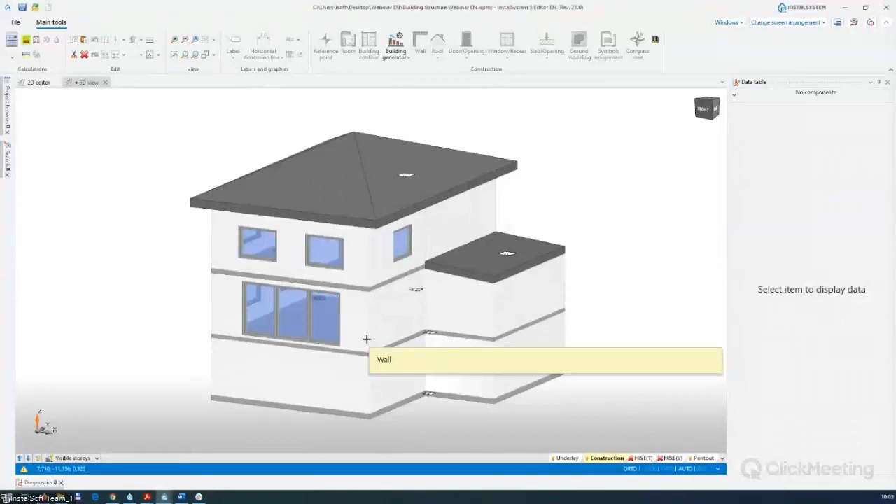In addition, I have prepared another more complicated object for you for today's webinar. These are files based on 2D underlays and BIM files. The whole webinar is connected with the related preparation of the building structure webinar that is available to you on our channel.

And especially the BIM design, which was also conducted with you at the beginning of this year. You can find this webinar when you go to our YouTube channel - we have a special section, InstalSystem 5 webinars and tutorials, just for you.

The plan for today's webinar is as follows: a presentation of tools and recommended design path for calculation of design heat load of the building and its rooms in InstalSystem 5. First, we talk about the available methods of determining design heat load. Then I talk about the new program interface for efficiently performing detailed heat load calculation. Then the main stage will be the recommended path of using the program, with description of individual stages and selected aspects of the calculation. We talk about the standards, how to define the properties of thermal partitions.

Okay, so maybe I open the project, the main project. What you see in front of your eyes is the effect of our previous webinar on the structure of the building. I hope that some of you participated in the previous webinar. If not, I invite you to our YouTube channel, in the English section, which shows exactly how to get to this stage.

Before we get into the design process, which you will see presented as part of the full building structure, the first important thing is that if you want to get the full heat load calculation, you need to have the full building structure. Maybe we will remain in this view, and I'll use the function to hide all walls in 3D view, and now let's move on from general data to room data.

Just click on Windows, General Data, and Room Data. Okay, first we talk about the method of calculating.

First, you can directly impose this value using the user-specified method. So in each of the rooms, you can declare the heat load of the room yourself. You can simply select based on the coefficient that we declare in general from this field for our rooms by switching accordingly in this list.

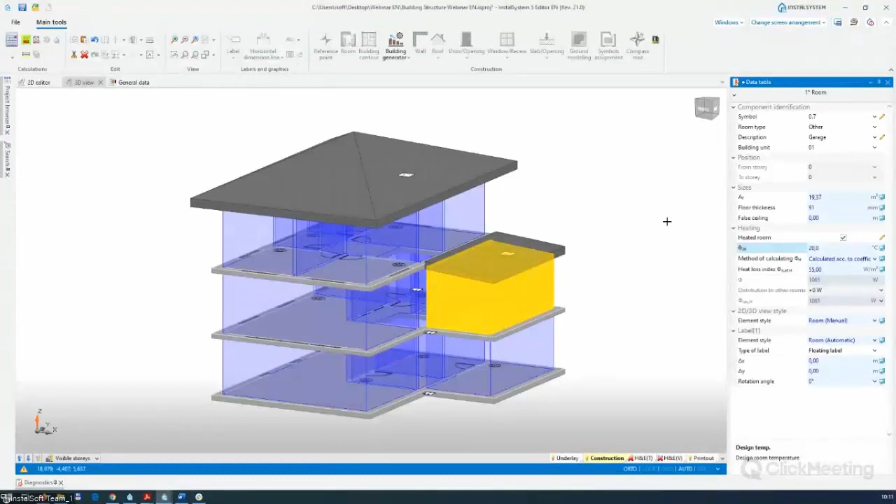It's also important that the room itself must have a checkbox checked that it's a heated room. So briefly speaking, for each type of room, whether for the project, in groups or for individual rooms, you can put this value. For these two options, you do not need the full building structure. The full building structure is not required.

Okay, maybe I go to the general data again, because we will focus on the third option, calculation according to standard. So we can calculate the full heat load. Calculating the heat load of rooms is based on automatic rooms. To obtain such rooms, you must have the full structure of the building, horizontal partitions, vertical partitions, sub-partitions, for example, windows, doors, and openings both vertically and horizontally.

This has to be recalculated by this button, which is our building structure calculation algorithm. Based on the correct calculation of the building structure, we can approach the calculation according to the standard. This is our beginning. In version 5, there is no possibility of tabular calculation of a building that does not have its graphical representation. Certain elements can be added or deleted tabularly, but when it comes to the object itself, this is not possible. We base on the graphic structure of the building, which is the entrance to our project.

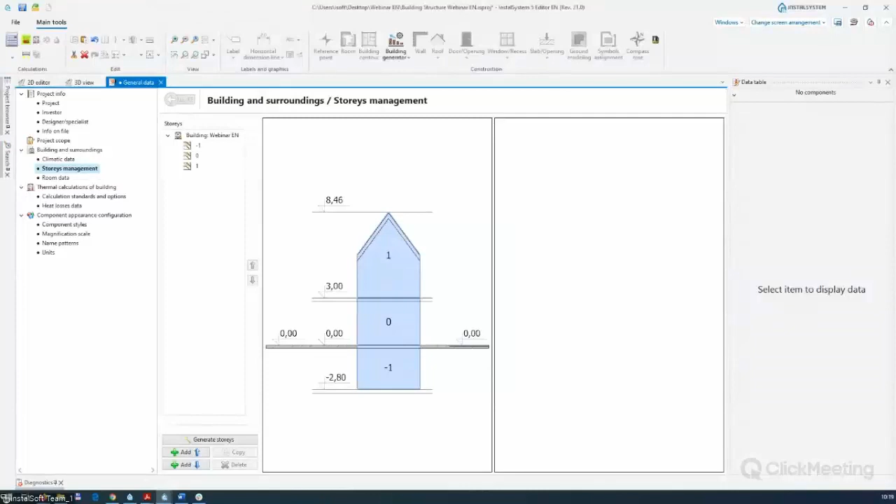And now we go to the heat losses data. Please see, all this information is already filled in here. The question is, why are they filled? Because we made the calculation of the building structure. The building structure supplements this data, and it transfers to us the data on the preparation of the project for calculation of the heat load. And all these fields are filled.

I go to the room data. I left the room data for the end because there is a mechanism to greatly speed up our work in the program. What you see are the types of rooms. This is the consequence of what we have chosen as a standard for room losses. These individual standards or their variations determine the available pool of room types.

Generally, this interface is brand new. From the left you have the general data. In the middle we have a whole panel regarding settings. On the right, however, we have the data table, which contains all the details about the given types of room. What's important from the point of view of the data table? We can modify and set our own properties. You can create your own room types. You can click, for example, other and add.

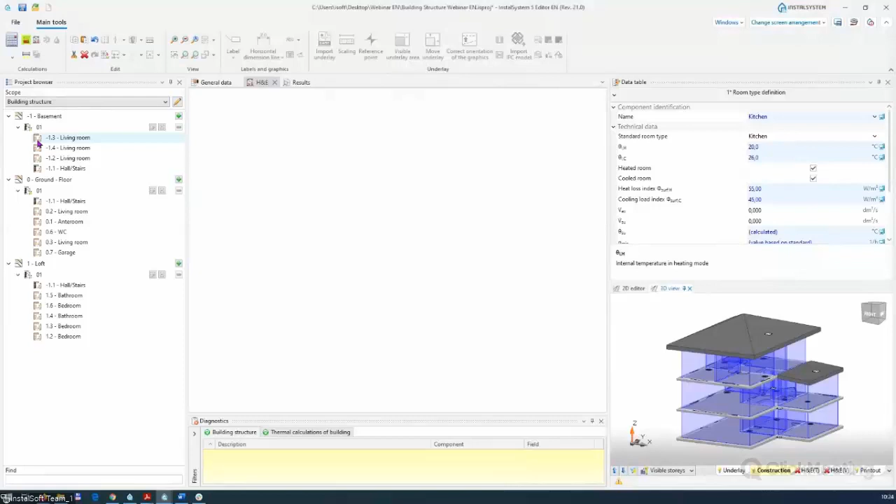The first thing I want to present, one of the first points of our webinar, is that we have introduced a new data entry interface for heat loss calculations. Maybe some information about the interface itself and its ergonomics. I changed the screen arrangement to heat and energy scope. Okay. Okay, maybe in this way. What's important for us?

To work in this module, we mainly use the 2D editor, 3D editor, project browser, heat and energy window, that's the main change, and data table. I highly recommend this layout to modify and set it yourself. We have prepared a predefined view for users, but it's an introduction to your own window settings.

How to set these windows? I think you have mastered it well. We have made a new interface organization for introducing heat loss. This applies to entering detailed data for partitions and specific room data, for example, the list of partitions of each room. Before I show you how to define a partition, it's worth showing you what we get thanks to the fact that we have a properly prepared building structure.

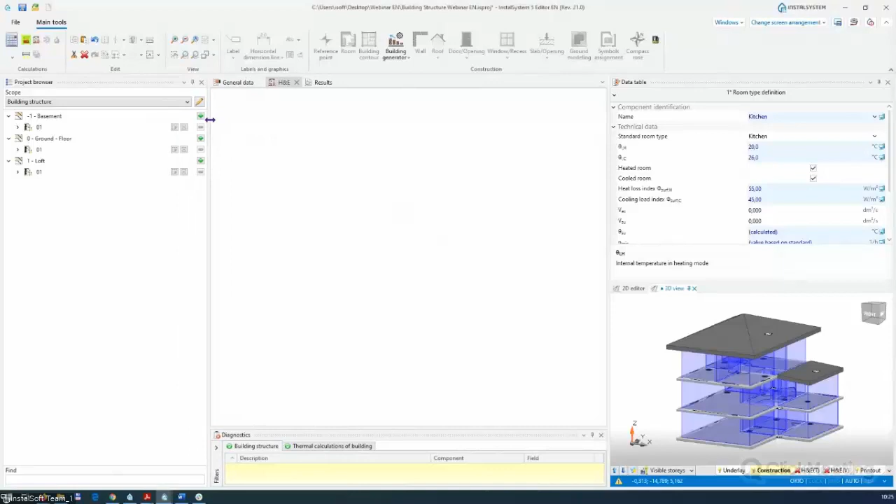When I expand my project browser in our interface and then switch to the heat and energy scope, we have a list of the entire building divided into stories, then building units, and rooms assigned to these building units. Okay, maybe I expand this. It's also worth noting that during the previous webinar, I showed how to properly define building units, how they are formed, and what the correct definitions influence.

When our building structure is recalculated and there are no errors in this respect, in these windows we get all partitions determined by the program automatically based on calculation of the building structure. Maybe I change the layout and put the 3D view in the middle of our program, because when I change to the heat and energy scope, and invisible when inactive for the construction, when I expand each room, thanks to the building structure calculations, you have the logical partitions.

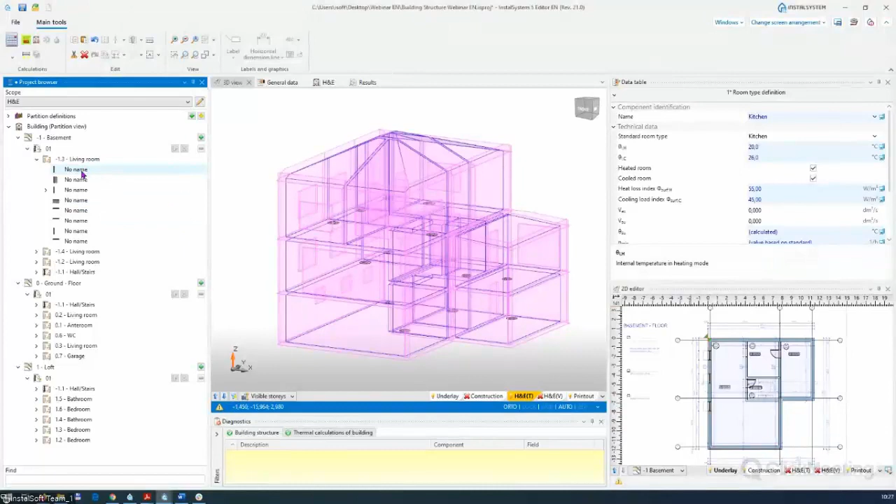Okay, the program gives us the opportunity to verify these designed partitions, the selected partitions in the project browser. For example, this one. It indicates it's a logical partition and it's active in all active windows. This is a great help in version 5 because we can see it all in our project very precisely at this stage. I also have information, for example, for this internal floor, about this logical partition in the data table of the selected partition. So here we have the whole list of partitions thanks to automatic rooms.

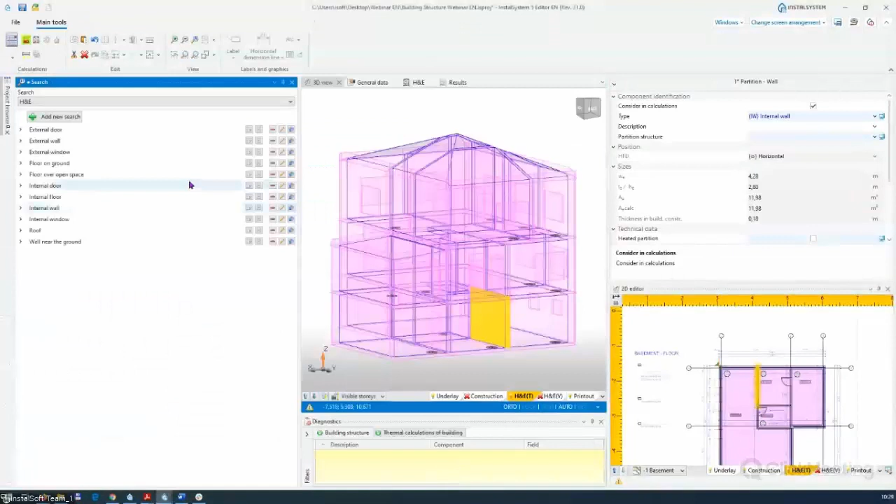The next window I want to show you in the scope and on the 3D view is the search window. The search window also helps us to verify all of this. Now I will show you how it works. We have prepared some predefined criteria for searching for partitions by a given type. We can verify them at this stage. Maybe I expand this view. For example, by selecting a particular partition using this button, I can select all the external walls in my project and simply verify my project.

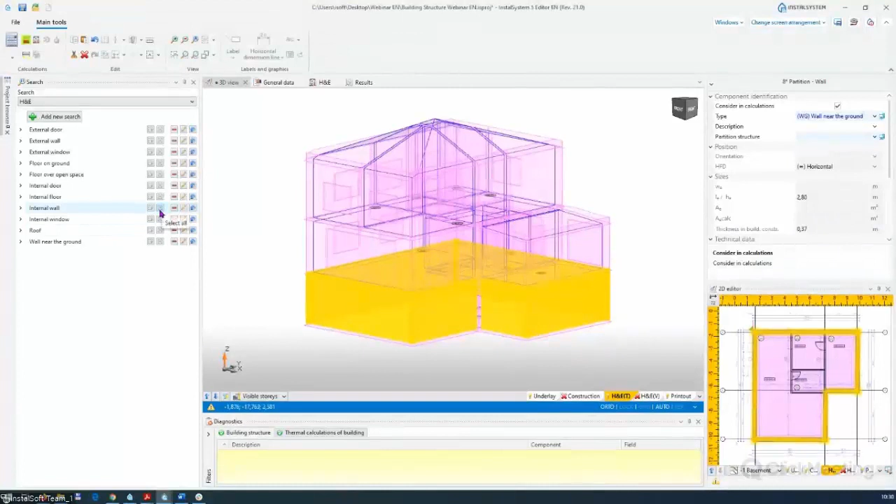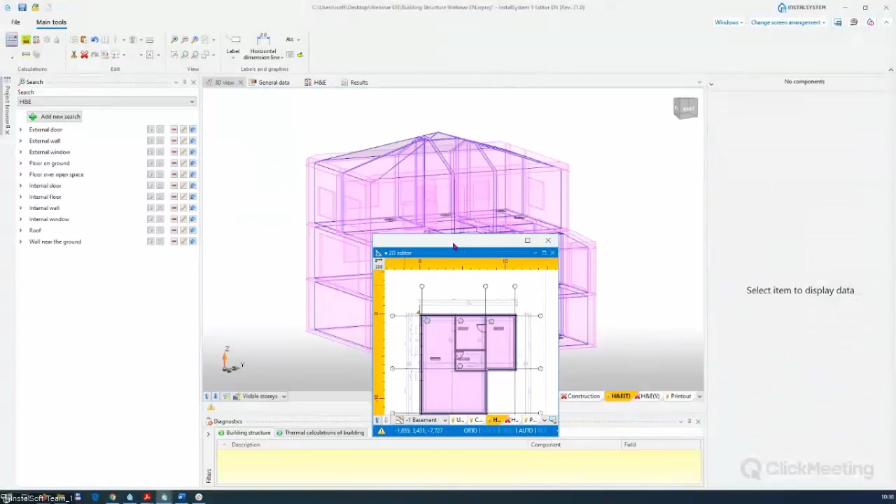I can simply click on the external wall. For example, it could be a wall near ground, as you can see, or the internal wall in our project. Remember that with this window, we can also define our search criteria by using the edit button. We can also use this button to mark partitions within our specified area. Maybe I change this.

That's my heat and energy scope. When I use the function, for example, external wall, and use select in rectangle components of defined type, I can click and select all the partitions which are external walls. I'm on the basement, so maybe I switch to 0, and now I select all the external walls in this area, and it works this way. Of course, on the 3D view, I can show all my external walls of this type in my project.

Each selection can be single or group and is reflected in the data table. Here we have information that in our project there are 3 marked partitions of a given type, a great solution that I personally always use and highly recommend. This is the basis for doing our work in a highly ergonomic manner. Okay. Some information about how to define partitions.

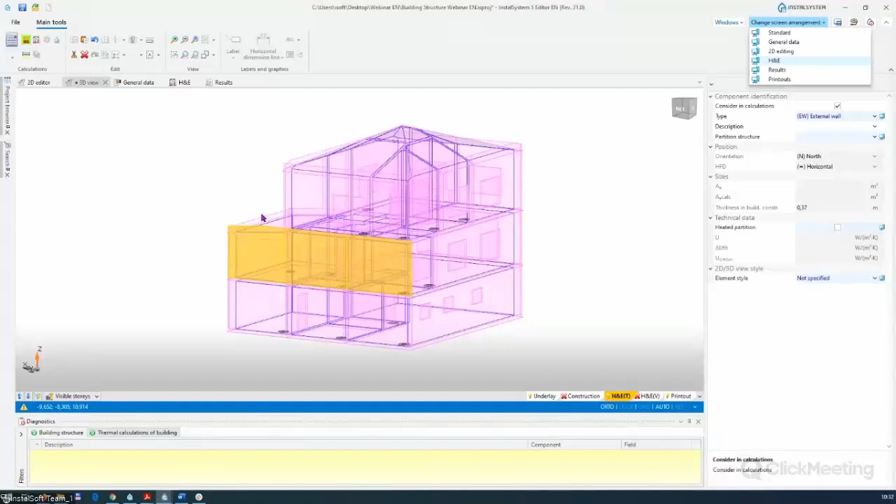In our new interface, I would like to show you how to build an exemplary partition definition, which we will then want to assign to the logical partitions designed by our program. Let's switch to this view and expand heat and energy and partition definitions. So at this point, we have 2 small classes. One is green and one is gold. For now, I will focus on the green one.

So when I click on add partition definition, I can build such a partition based on my data. First of all, I can define my example partition with defined layers. It's very simple because I can add the next layers by clicking this plus. I have the construction materials editor.

In the new interface, when you are creating a partition, a graph of temperature distribution in individual layers appears. I can view the heat transfer coefficient here. However, I can force the program to calculate which layer I want to reduce to a given coefficient. When I have the next layers in partition definitions, I can click with the right button and I can reduce to a given coefficient

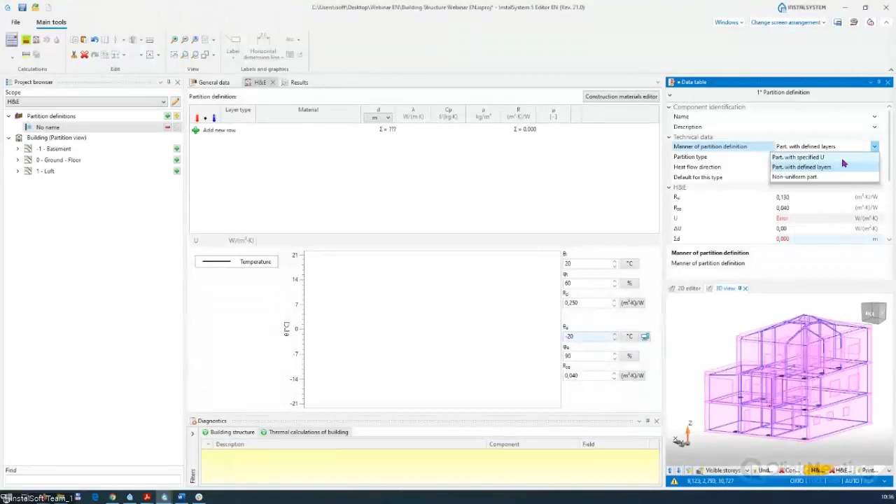Okay, I have prepared such partitions for you in a separate file. Once created, a partition can be used many times for other projects. So let me delete these partition definitions with defined layers. Okay, and here by pressing this golden button, you can load partitions from another project and click OK.

I click and I find this. This is my definitions. Okay, I click open. I have the next window. And then I click OK. And here I have the list of my partition definitions from my other file.

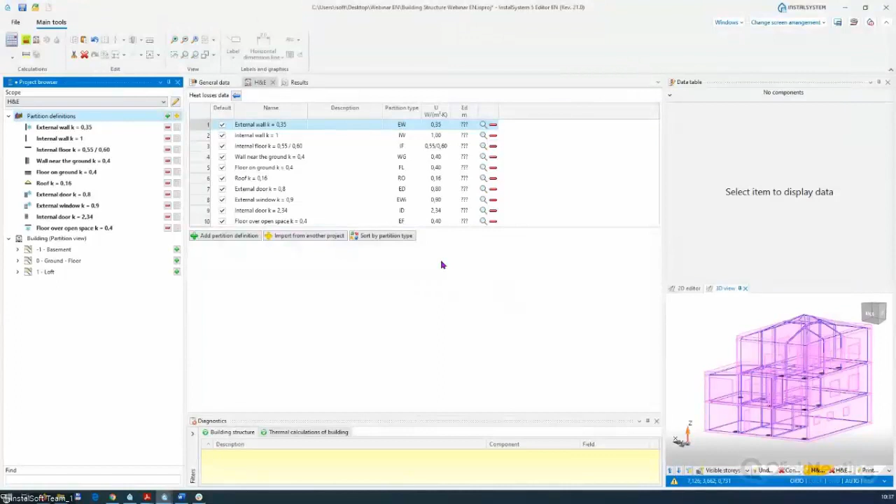First, in our new interface, we have moved specific data for a given partition of this type to the data table. Maybe I click on the external wall, because here is very important information. See how this partition is constructed. For a better visualization, I moved the data table to the middle of our window. Okay, data table, and that's my partition definition of my external wall. Okay.

This partition has a name, of course, and a chosen way of defining this partition. The type of this partition is specified. Okay, that's the external wall. Here we have the direction of heat flow, and note that I have the heat transfer coefficient for this partition definition, and note that we don't have a given thickness. Okay. Here we have important information: default for this type.

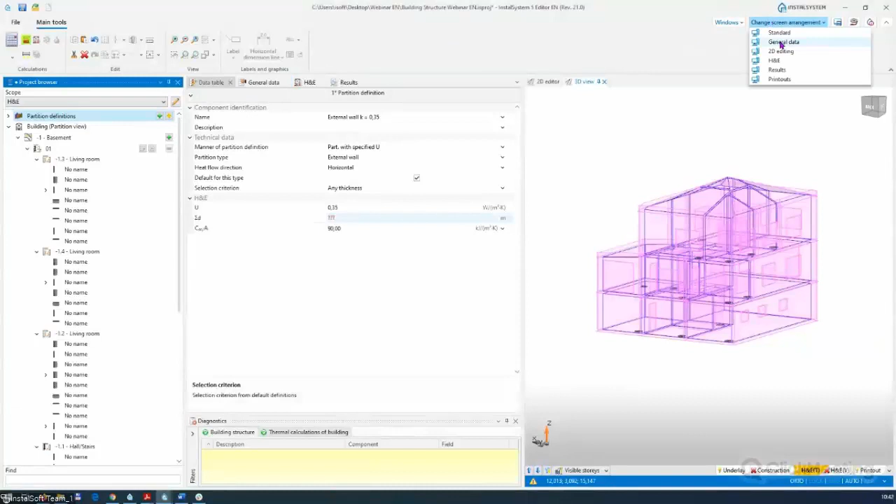Ladies and gentlemen, today we are working on our new release marked 21.0, which brought another huge amount of news. Before I calculate heat load in this project, I would like to go back to some aspects that should be defined before performing a complete heat load calculation. One more thing I wanted to show you. Let's get to the general data. I change to the general data in this way and go to the stories management.

Okay, the first thing is that in stories management, you can define your ground modeling in two ways. The first is by putting the value of story elevation. That's one way. Here is the basement. Okay. The second way is when you click on the building, you can define your ground elevation. Okay.

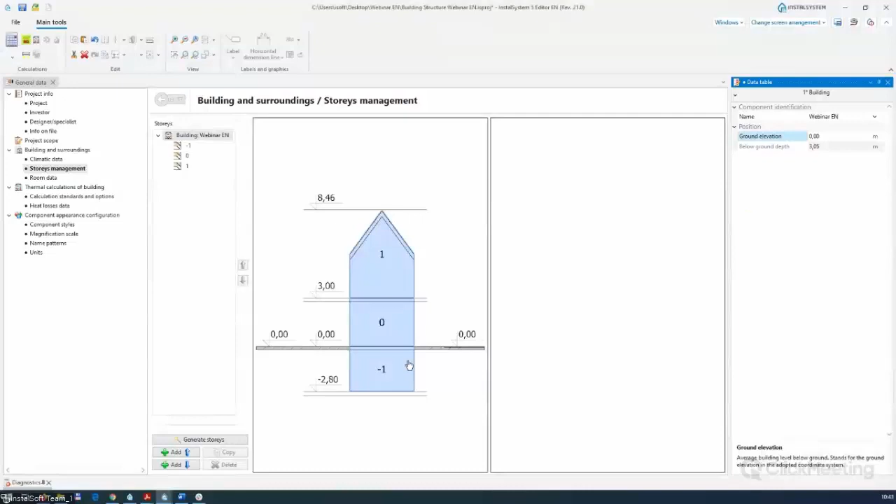If you, for example, calculate a project again, for example, I change this position to minus 1.5, okay, and make only building structural calculation, we can go to the 2D editing, 3D view, and after this, by search window, you can mark, for example, all your walls near the ground.

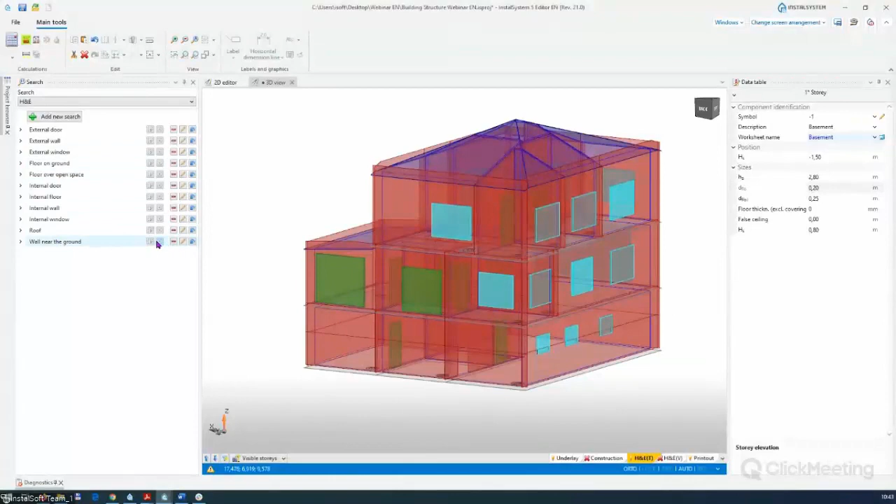The program defines our ground based on your type of partitions, based on your general data, based on your stories management and your position of the ground. On the other hand, we extended this functionality and in this field of construction, a new function appeared under a new icon, which we call the ground modeling.

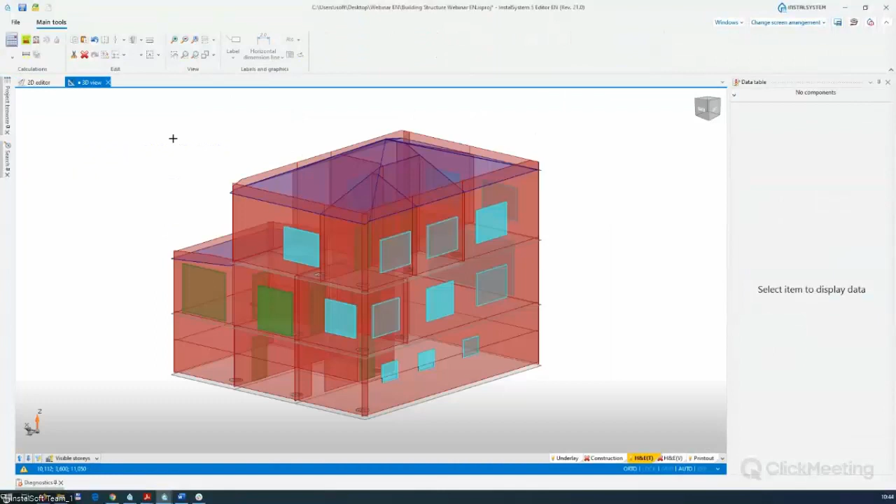When I change the editing screen arrangement to the construction, and the same for the 3D view, maybe I present all the walls in the 3D view, okay. Here we have the new function ground modeling. This function enables graphical ground modeling using a building boundary.

In practice, it works in such a way that with the help of the building outline, which I will draw in a moment, we define the line which connects the ground with the external walls. An element symbolizes this ground and appears to us in the 3D view too. So just put the ground modeling. 1, 2, 3, 4, 5, and 6. Okay.

I have this elevation based on my general data. When I switch to the 3D view, as you can see, that's my ground. Okay. Maybe for my purposes in the general data, I change the component styles of this ground. It could be, for example, a green one with some transparency, maybe 10%.

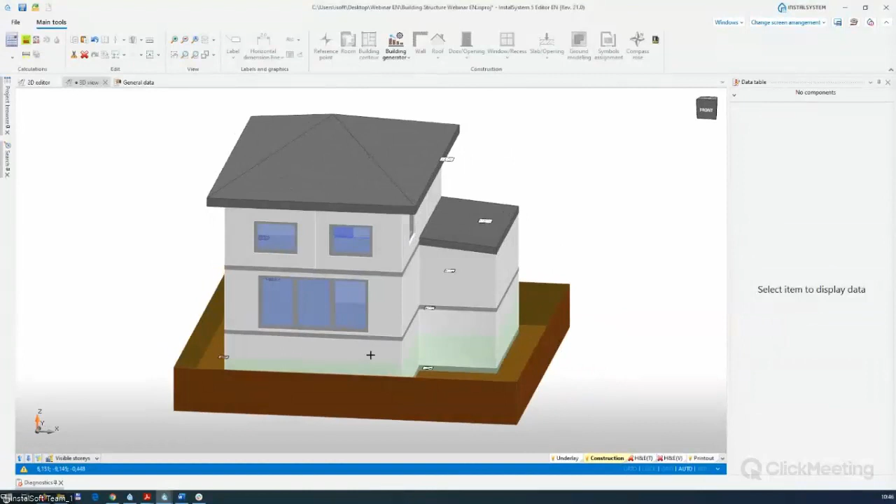Much better. Okay, and now on the 3D view or 2D view, when you click on the label, you can use these fields to individually change the slope of this ground. This line will adjust to this external wall. For example, I could put here 1.3, and here I have some kind of slope in my project. Okay, it's very easy.

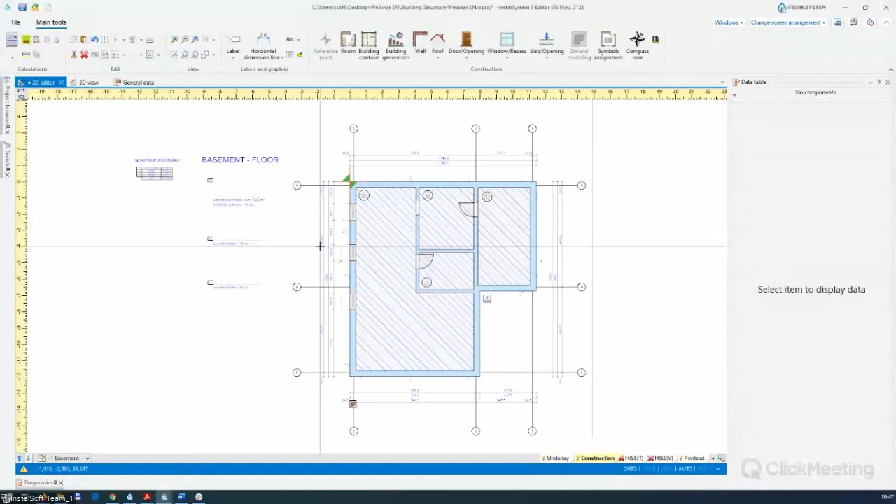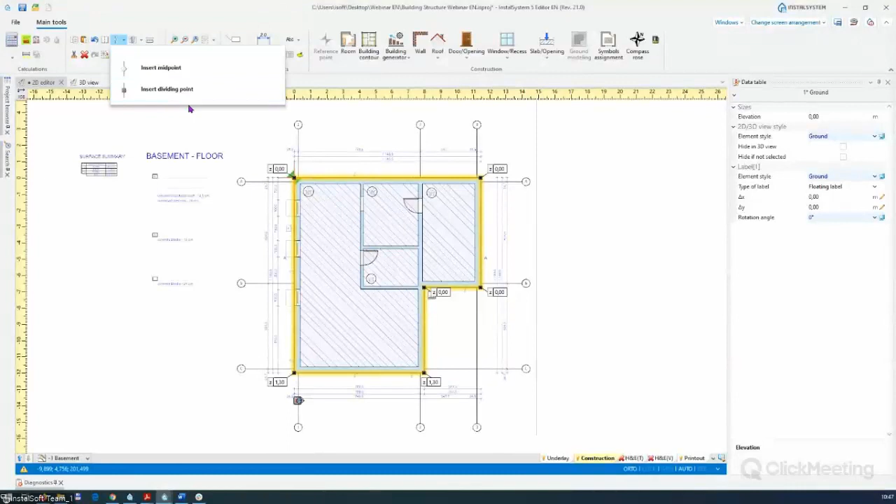When I go to the 2D editor and click on this boundary, I have another option, because by clicking this button, insert dividing point, I can insert by myself extra points that represent an additional point of collapse. For example, I can click insert dividing point and put this in this field, and just put, for example, 0. Okay, here is the representation on the 3D view.

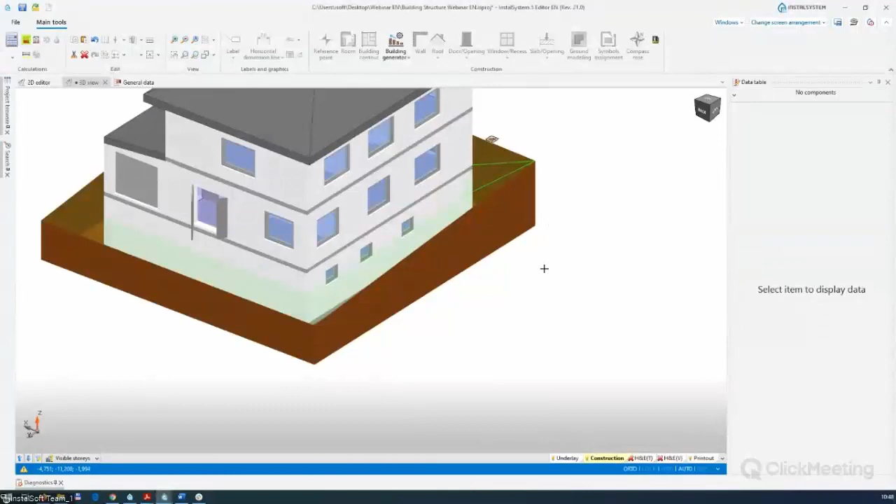The program calculates an approximate appearance for you, but the most important is this boundary which is connected with the external wall, because it determines the actual contact of the ground with the external walls. Such grounds can pass through many stories. So I think it's a very great solution because it can reflect one-to-one the actual situation of our project. For example, in mountain areas, or where the ground is just a different shape, which happens in principle always.

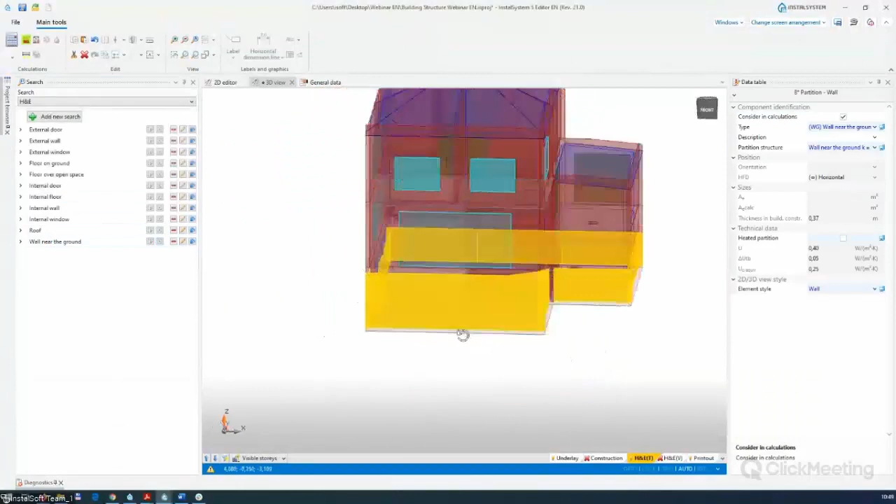Now it's only to make the calculation of the building structure, and then when you change the scope to the thermal partition, here we have this line of our walls with the ground. For example, I can click on the search and on the ground. Okay, so it's working in this way. So very nice functionality in our program.

As you can see, I do not need to define these kinds of situations very precisely, because the program knows that here is the window and this wall's partition area is extended by this window. So it's working in this way. Okay, I think it's enough to perform this calculation to redefine the appropriate dimension of our logical partitions. Great solution.

I will also show you some other projects that we can achieve with our modules related to the building structure. Maybe I'm now going to show you something bigger to awaken your imagination about the project that our program supports right now. That's the first one.

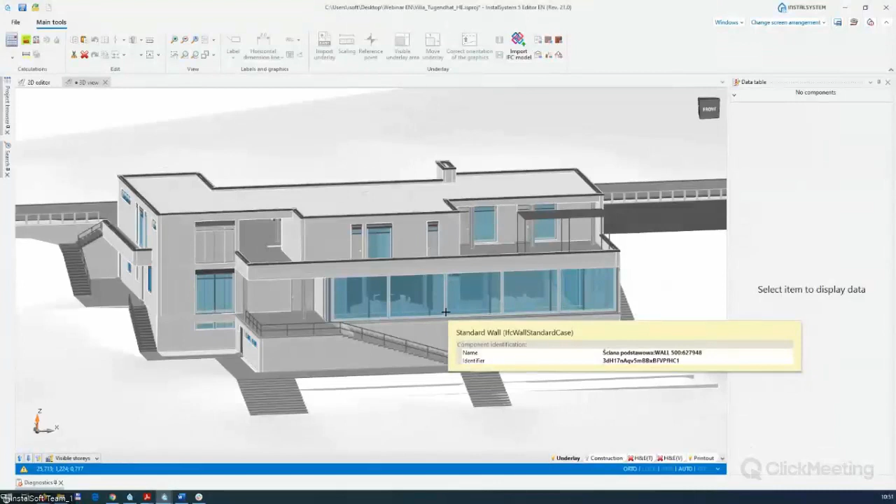We obtained the previous project using our standard building structure path, conducted in our full building structure webinar. This path is based on the 2D underlays, the rooms, the building boundary, and functional automatic walls, slabs, and roofs, which close our rooms with a single click. By making the calculation, it turns our rooms to automatic ones. By the way, this project comes from the BIM world and was modeled in Revit.

From Revit it was exported to the BIM format, for example IFC. We have introduced new modules that allow a highly automated way to obtain the structure of the buildings, and of course the thermal model determined by our program. When I go to, for example, I can click 'visible when inactive, only edges' options, and I make the construction based on this file, and here we have the full heat load model.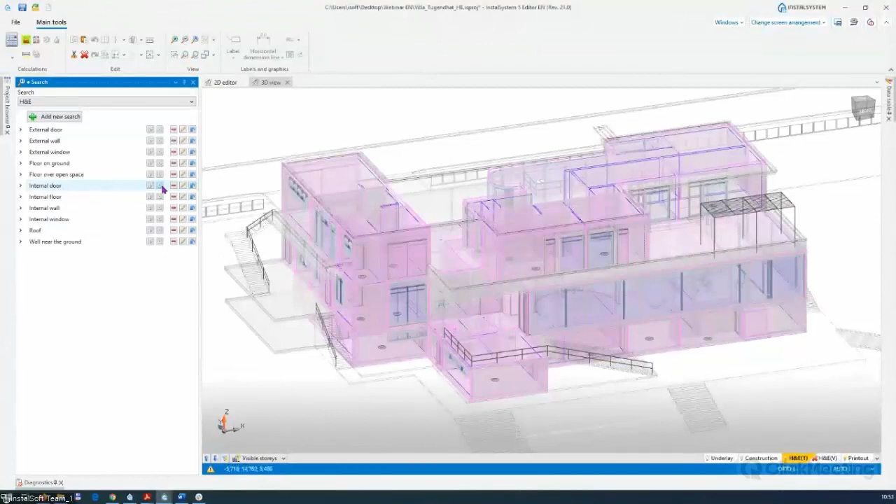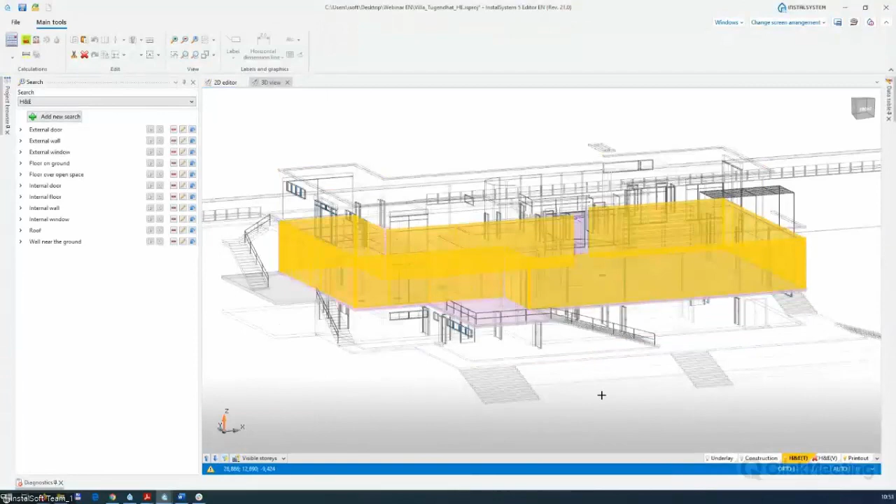It's very nice because, for example, you can verify your project very easily. You can use your search window, go to the heat and energy scope, and check all the internal doors in our project. That's our logical partition. For example, I can mark all my roofs or all my external walls in my project, and I can make one of the stories invisible—very nice and easy.

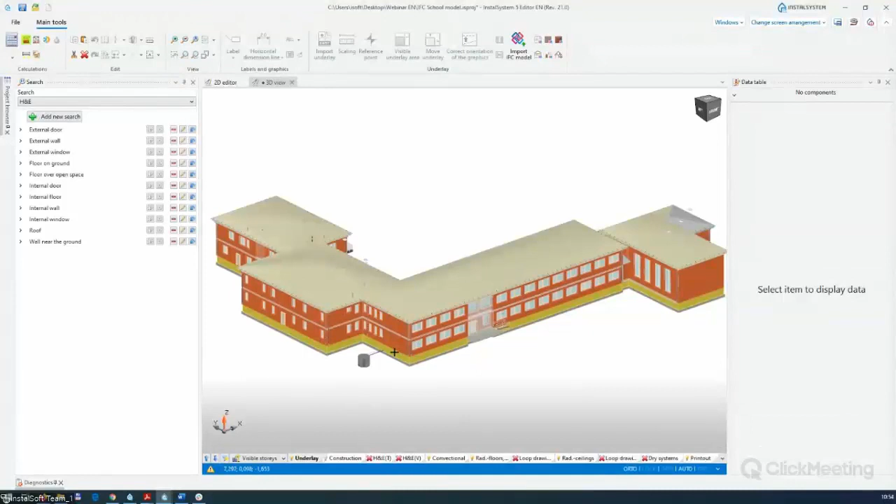Maybe I'll show you another project. Let me close this one. I have another project for you from our program, based on an IFC file—it's a school. This was also processed in our program in less than 15 minutes using our mechanisms and BIM modules. So here we have the construction, based on the IFC file—just 15 minutes and you can get this kind of building.

Based on the structure and your automatic rooms, you can get the full heat load model in our program. That's the way. If anyone is interested in this subject, please visit the BIM design webinar—there I show you how to obtain such a thermal model from such files in our program. I think that is a kind of revolution, already available to you, which completely changes the speed of design.

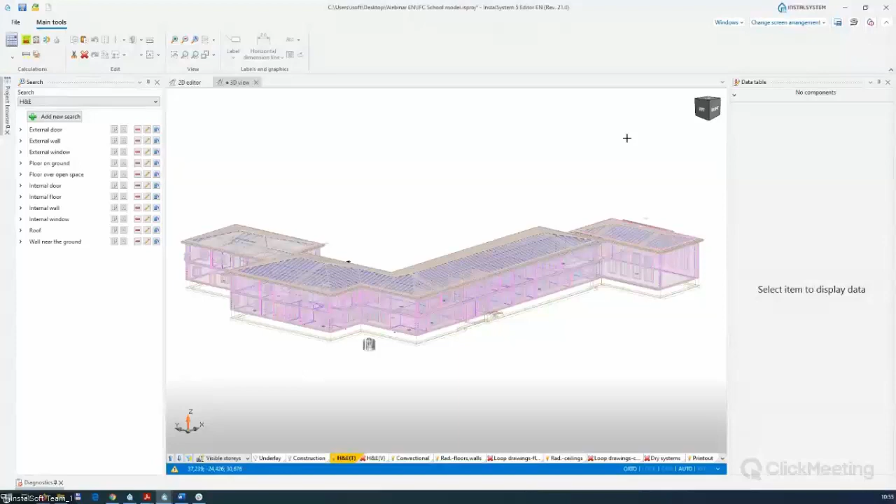Maybe the previous project, I'll close this one. Let's go back to our thermal calculation, having all types of partitions defined in our project browser window. We can now proceed with the calculation.

This is the button in our program for the thermal calculation of the building and the building structural calculation. Maybe I will now perform the building structural calculation and thermal calculation in my project. Perfect, and see what happens when you change to this scope. We have this information earlier because I made the building structure calculation, but what's important is what happens when you make these calculations.

All these partition definitions from the other project were assigned to my logical partition. That's the consequence of this field default for this type. All of this is clearly visible in this tree in the project browser—all graphic partitions received their definitions. I think it's a fantastic thing, and for such projects this is very easy and fast. This is all I have to do to get the full building structure and make the thermal calculation results for the whole building.

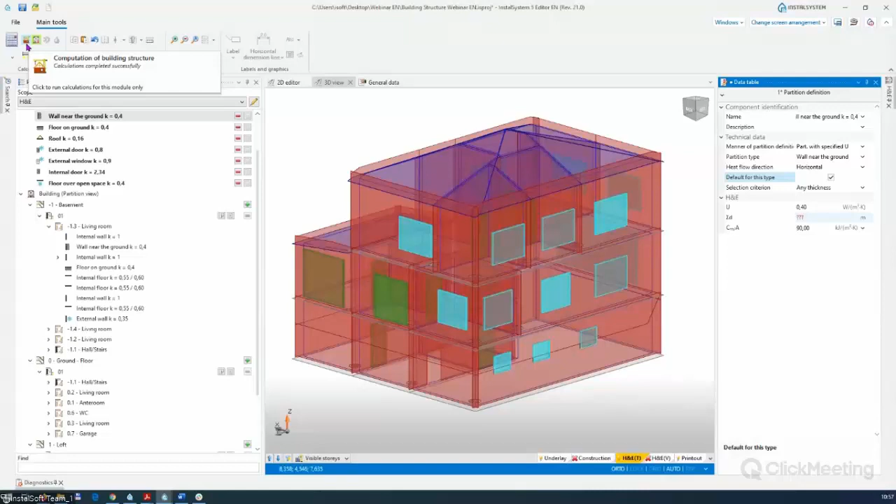So after making these calculations, I can go to the results. Maybe I'll expand the diagnostic—I'll talk about that in a moment—but for this building I have all the results based on this standard. Here is information about my standard, and here we have the results for the building. Everything is of course counted.

We have a list of heat losses in rooms, so we can check all the information and other thermal calculations of the building—very easy, and so on. Here is the diagnostic. We have only hints—this is a new class of diagnostic. The program basically only informs us that these partitions do not have the thickness entered, but in this case it's only a hint that does not affect the results.

Based on our schedule, I come back to the building units. I come back a little and take a step back, because it would not be me if I did not show you a few improvements in our program—instructions from me that strongly improve comfort in our program. We will return to the aspect related to the structure and building units again.

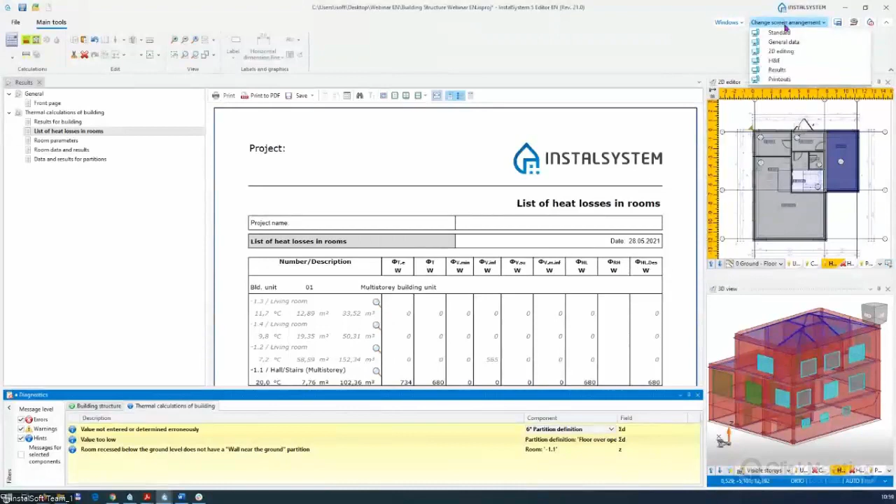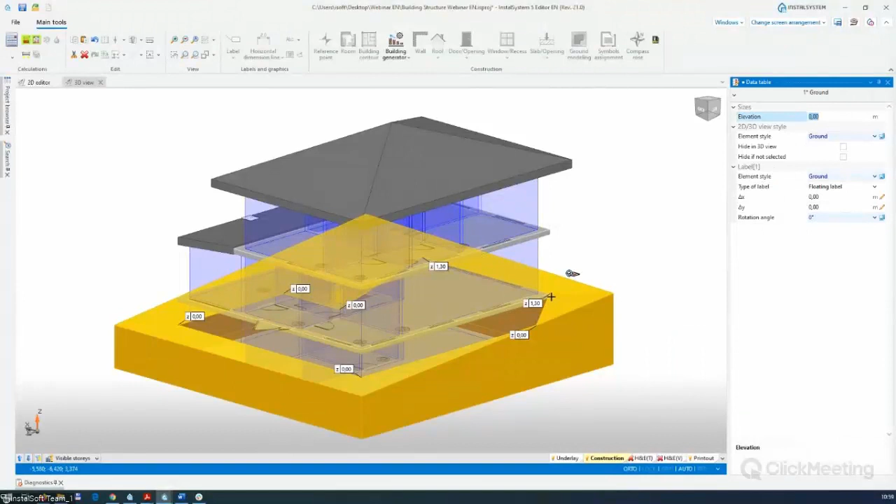Maybe I'll change to editing. First of all, maybe I'll save my project. Okay, and go to the construction and 3D view, go to the construction, and maybe hide all walls, and do the same with my ground—hide it in 3D view. Perfect.

I will also show you some interesting facts regarding modeling of thermal partition for dormer later, but now we start with building units. I disturbed the order a bit because the building units should be previously defined, and I reserved that this operation should ultimately be performed before performing thermal calculations.

First of all, when I go to general data and room data, we have new options. A new list has appeared that allows us, which was not the case in the previous webinar, to determine whether the units are created separately for a given floor. This is the default setting, as I said in the last webinar, and in the case of such small buildings, probably more ergonomic.

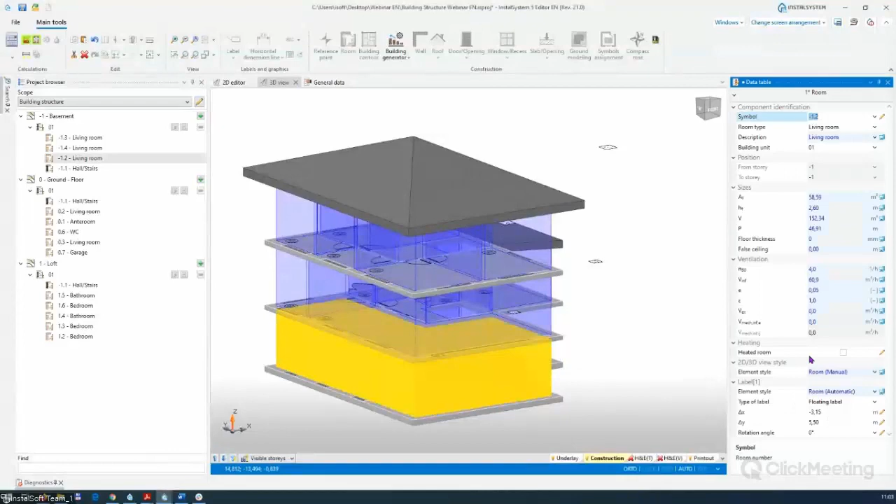The basement is usually unheated, and such modification, when I click on my room, this kind of modification I've done previously in my project before our webinar. So I have this room unchecked, it's unheated. That's the second one, it's the unheated room. Here we have this multi-story room, so it's of course a heated room.

So I have 3 unheated rooms in my project, and when I check all my rooms, for example from this project browser, one by clicking the control key, two and three. Now I have the 3 rooms selected.

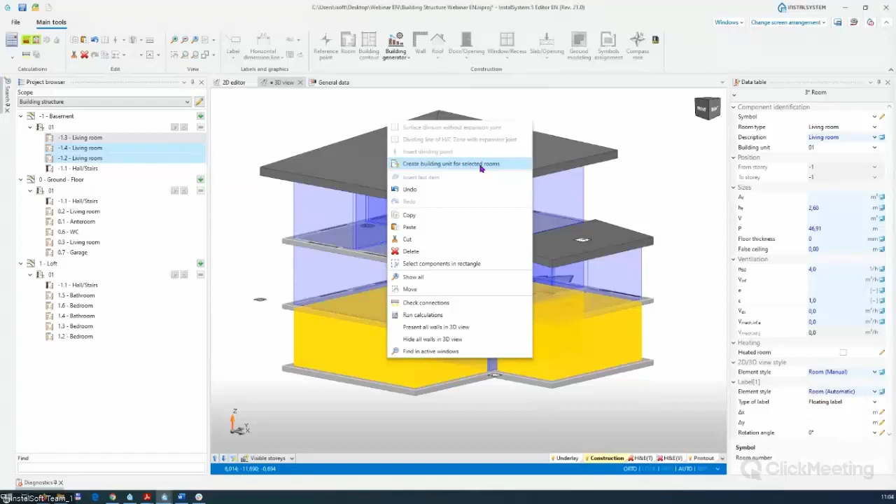Now I can move my rooms to a new unheated housing unit with one click. Super quick solution, because just click the right button and I have the new option, create building unit for selected rooms. The new one is created, and these 3 rooms are assigned to this building unit.

I can put the name for the record. I will also enter the name here, for example, building unit. And all the information is in my project browser.

For my needs, I can make a clear distinction between these housing units in my editor in styles, element styles. It's a very fine functionality because I can go to general data, go to component styles, then go to room, and now add a new row, or copy the row. It could be, for example, I click Ctrl A, and it's my unheated room. For the automatic room, maybe I change the selection to automatic, and for example it could be a red one.

And change maybe the visibility to 50%. Then I need to change the 3D color for this one. It could be, for example, the green one - the green one, it's cold, it could be a dark green, for my unheated one. Then I need to uncheck my selection.

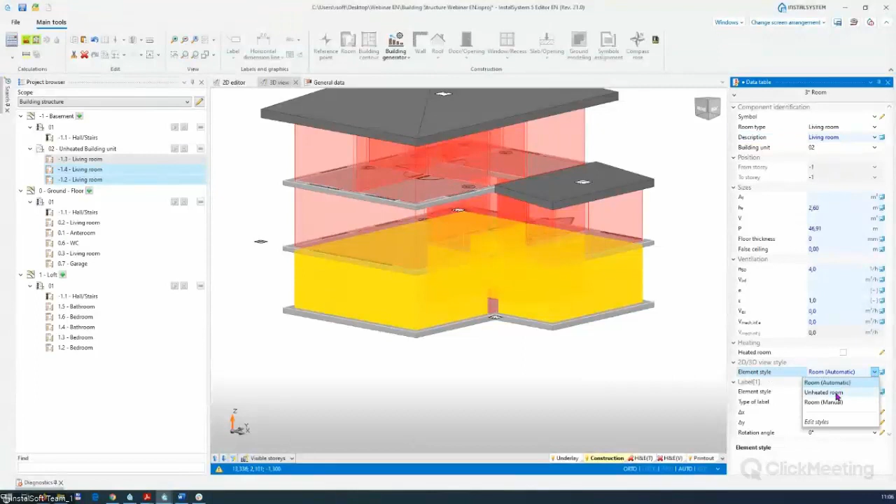So as you can see, I set my building units by this list, very easy, by the building units list, and then click by the right button. So it's very fine. The last thing I will do is the new sort function, which will sort the rooms according to their symbol.

For example, I can, for large objects, a great feature that keeps our project fine. So when you click on the building units, you can click by the right button and just click sort by, and as you can see, all the rooms which are assigned to these building units are clearly now visible and listed by this symbol.

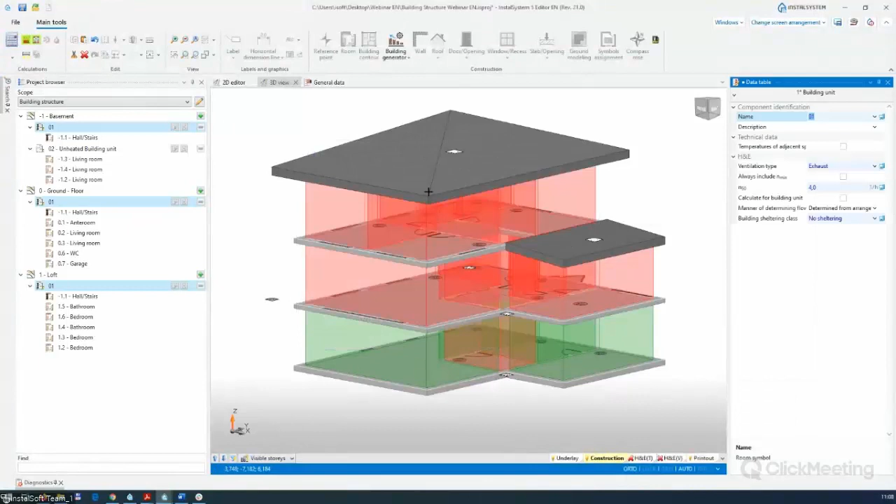For formalities, I will make the full calculation at the end, so the program will adapt to my changes. Let me save this project, because another thing I wanted to demonstrate in terms of the structure of the building and thermal model is a dormer. We have the plan about this, so I can show you some solutions for modeling dormers in our program.

We have a lot of questions about how to model dormers, how to deal with them, how to insert partitions on window type dormers when the dormer is flush with the outer wall. Let me show you a simple project to demonstrate how this automation works great in InstalSystem 5.

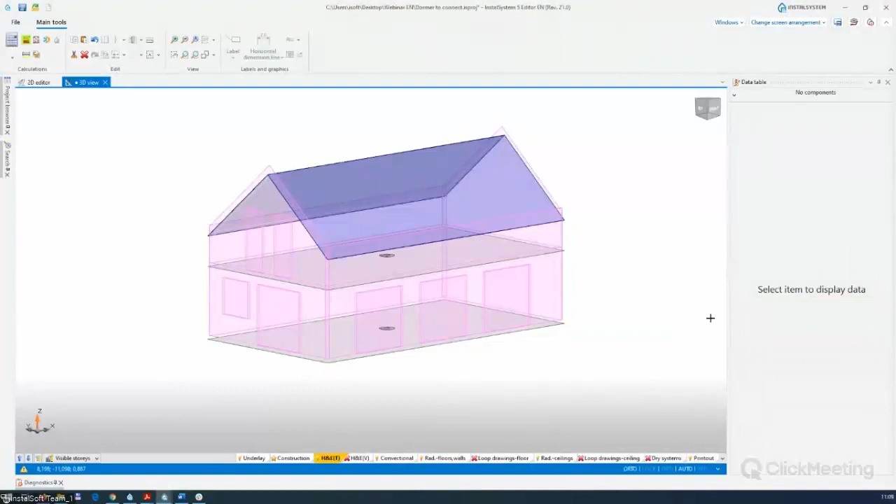First, I will show you the thermal model of this building. Okay, that's the thermal model. I'd like to design a dormer here. Take a look at the construction in the 2D editor - let me change the level to 1 and go to construction one. We have a dedicated icon for this functionality.

What's important is that it's a separate, independent element from the roof element, but it's connected by the fact that the dormer element must be inserted on a previously calculated roof, which does not report an error in the diagnostic window. Here we have the roof.

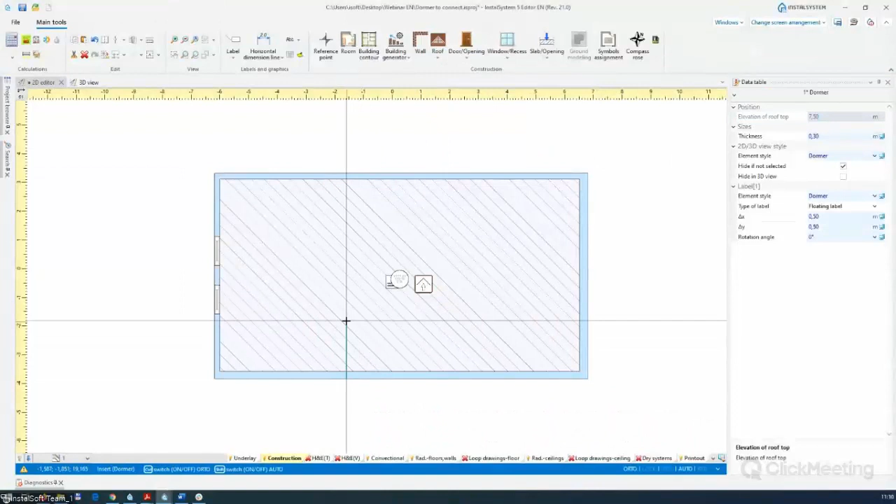Now I can define such a dormer by its roof. I can determine its slope. Let me change to the 3D view for better visualization, because here I can put, for example, a slope of 20. The program automatically calculates all this information.

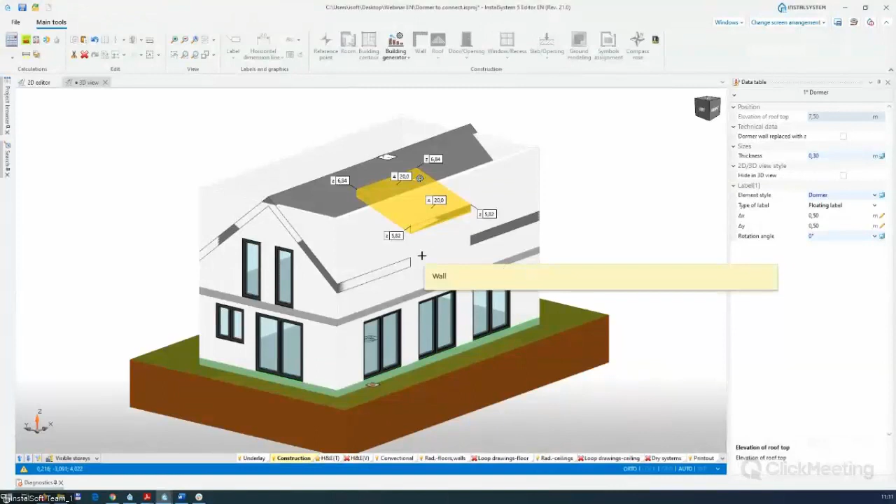After calculating the building structure, the program will automatically create a front wall for us, and if necessary, depending on the geometry, it will create side structural walls of this partition. Let me just make the calculation, and as you can see, we have the dormer here.

That's the heat and energy model. Here we have all the partitions based on this. Remember that the dormer must not have a roof that protrudes beyond the lines of the walls. From the point of view that it's a heat loss calculation program, I think it doesn't matter - I just inform you that sometimes we need to simplify, and I think there's nothing wrong with this.

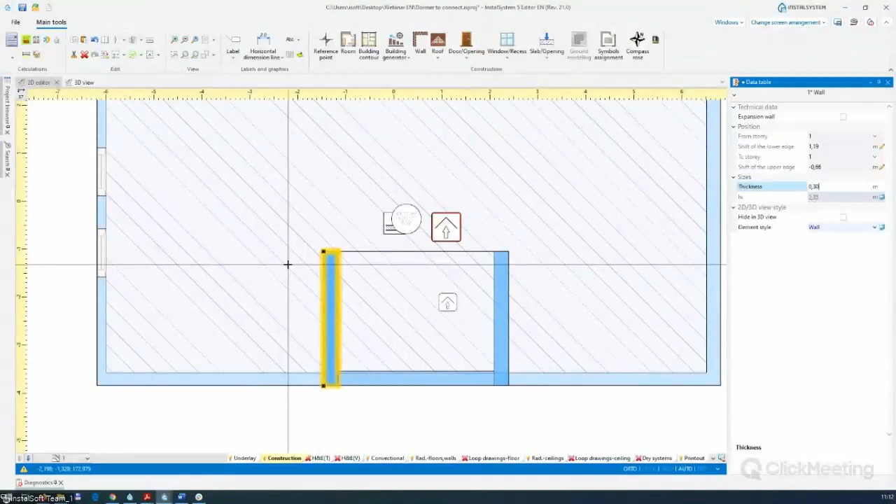The dormer precisely determines the thermal partitions, as you can see. So we have all the thermal partitions, and we have the right cubature of the room.

The dormer can be divided with the same tool like the roof, with these additional edges. So if you want to change the shape of this, you can easily use these hot points, or you can use the add roof edge - very similar to the roof. Please remember to follow the rules of mathematical geometry.

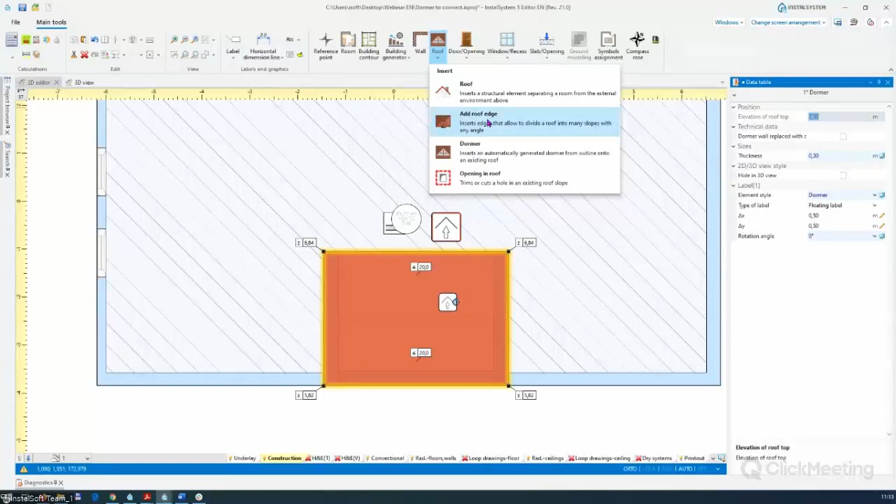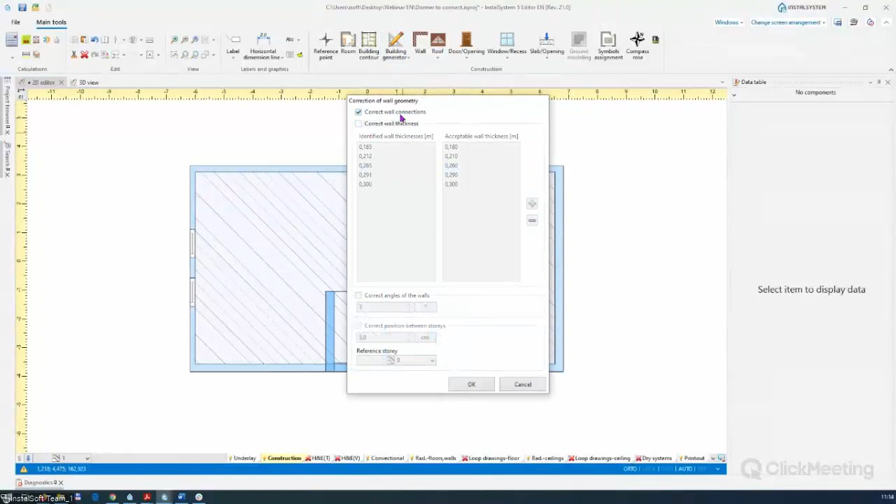What's new - the dormer can span many rooms, but only within one story. Remember that. For example, in this kind of situation, I just put the wall. Let me make the correction and correct wall connection. Perfect, and make the building structural calculation.

As you can see, we have such partitions. The program automatically creates a good internal wall when we separate this kind of area, and we have the dormer which includes many rooms, but remember, only within one story. It could be only on one story - we can have a lot of rooms, but only on one story. Remember that.

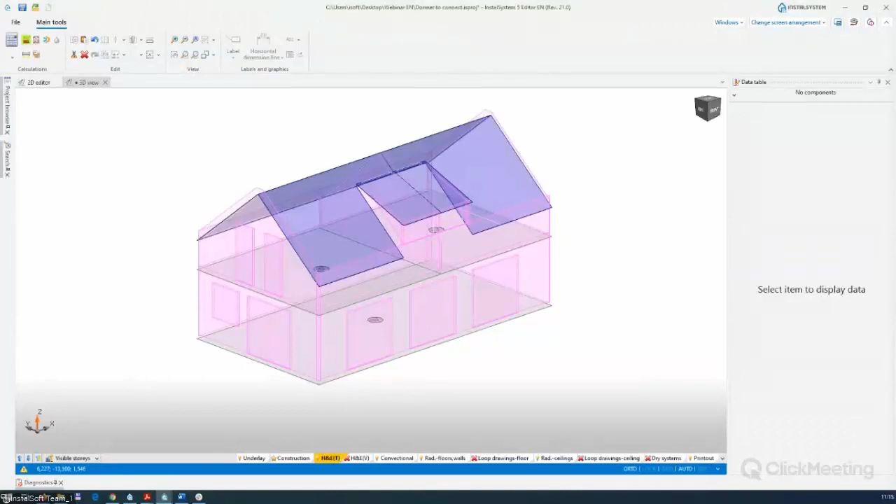I can show you some more examples about this dormer, some new ones, because sometimes on a project we have more complicated situations, and I want to show you how to work with them. Let me delete this one.

Let me make the calculation again. We have a new functionality that allows us to put windows, for example, for this wall. The dormer creates its own partition by default, fixed at 30 centimeters by default. Sometimes there's a situation where the window is contained within the dormer and the front wall.

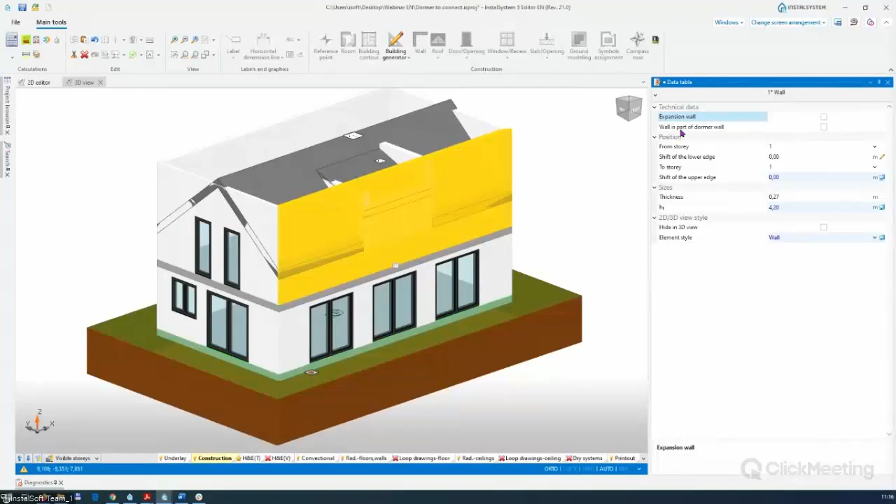I can do something like this. So we have the new fields, because I can check my dormer and click the new button, dormer wall replaced with a building wall. Okay, click on this, then click this one. Okay, and make the checkbox field wall is part of dormer wall. Just click on this, and when you make the building structural calculation, you have such a situation where you have the connected walls to each other.

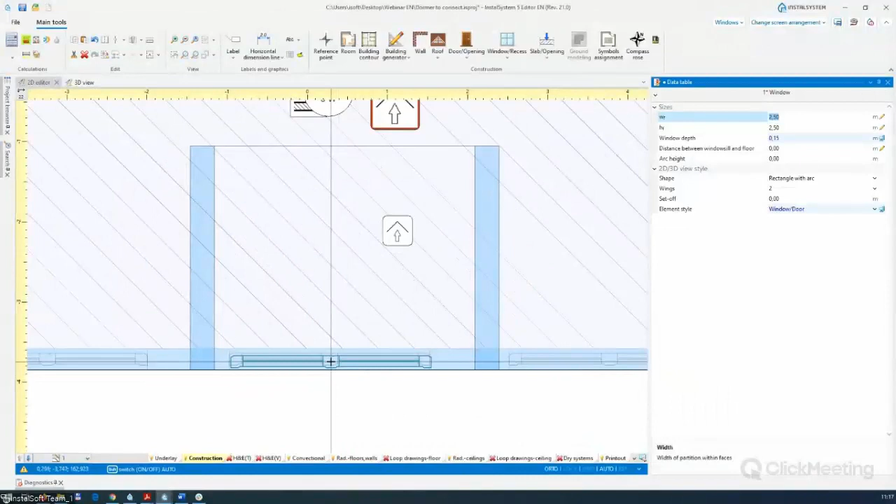Then you can put the right partition. For example, I can go to the 2D to 0. I can copy them by Control C, and go to one level more. Maybe I show the shadow story below. Okay, perfect. And now I put my window. Here we have this kind of situation, and when I calculate this project, all my heat model is correct. Great function. So that's the method of working with dormers.

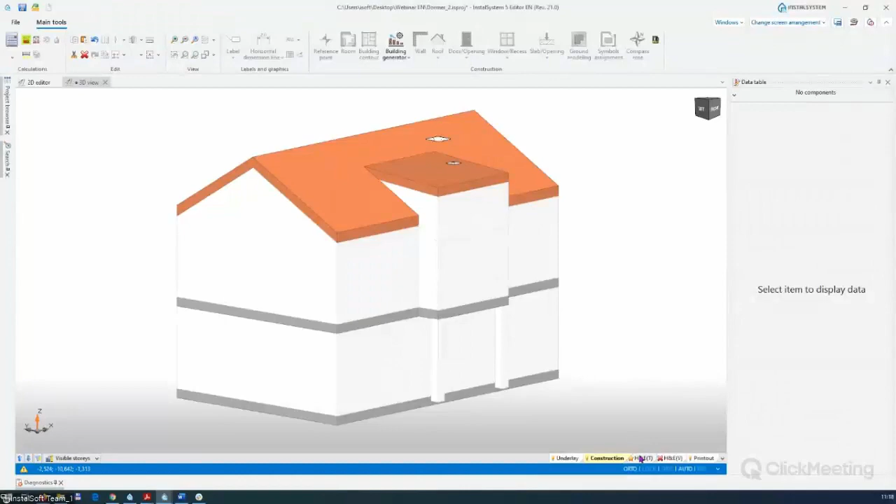We can, of course, maybe I close this project, because we can create more complicated situations. For example, this one is already in the form of a demonstration of what dormers we can count. It could be this kind of dormer. So when I change to the scope, you have all the information. We have one room, and that's another. Please note that we have good room cubic capacity. That's the first one.

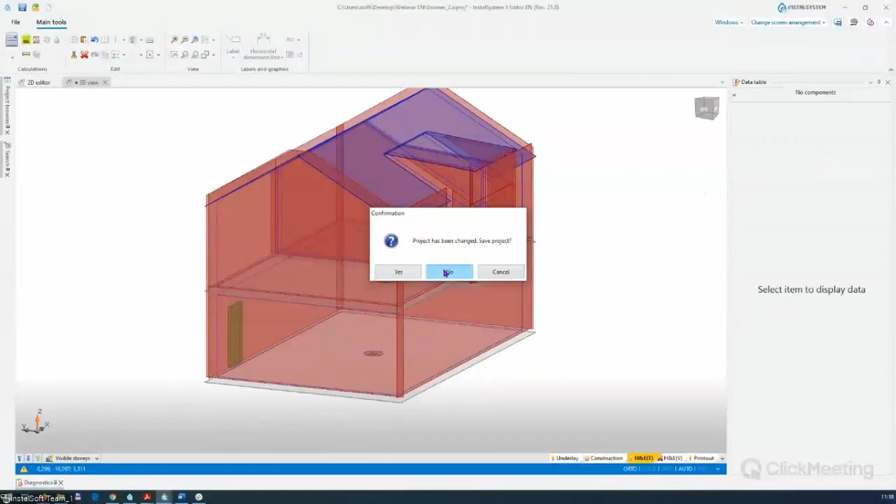Maybe something stranger, this one. It's the construction from our program. It's the roof with the dormer. As you can see on the 2D editor, when I change to the construction and go to the first level and construction scope, this is my dormer with roof edges. And that's my thermal model based on my construction. I have the gray when inactive, very nice view.

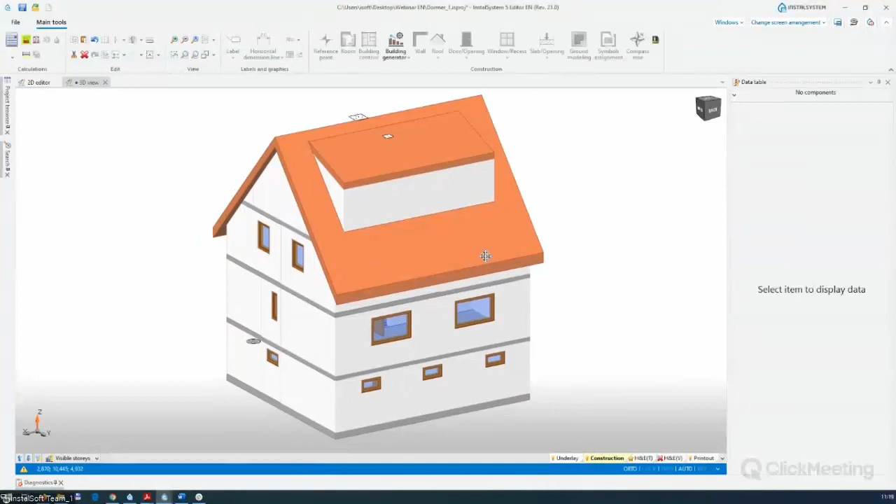And the last one, maybe the more complicated, but it's working in our program. It's the 1, 2, 3, 4 levels building with dormers, which include many rooms, and as you can see, the whole program generates this automatically. So very nice.

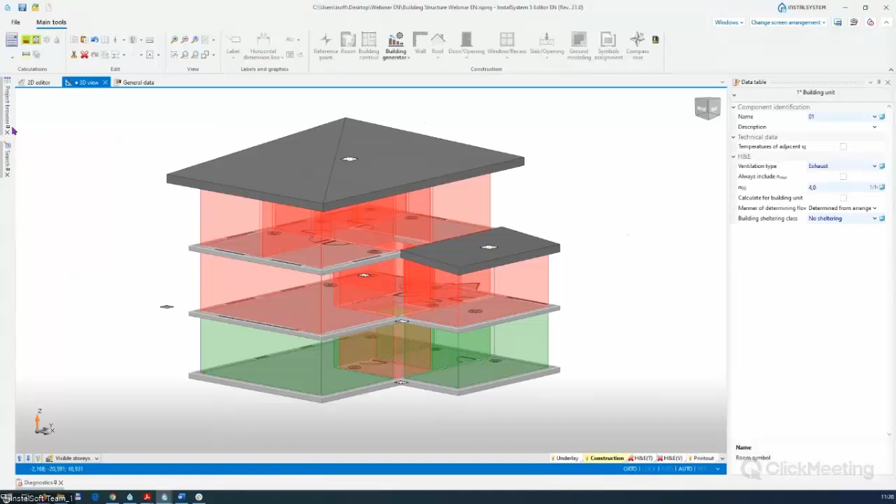We come back to the project because I would like to show you the issue related to the verification of the project and the possibilities we have in this aspect. The first aspect is visual verification. Visual verification can be carried out by using a graphical interface. The 3D interface and the search window, which I have already presented to some extent today, help us a lot on this. So maybe I open this one, the search window.

So how can such verification take place? Let's do it on the basis of our assigned definition of partitions and their correctness. The example will show these partitions designed as partitions in contact with the ground. So first of all, how to make this kind of verification? I go to the general data, go to the component styles, go to the heat and energy partition, and now I can add a new row.

It could be my wall. It could be my wall near ground. And I can put another color. For this partition, I can set, for example, a black one. So I can set many such definitions, and it depends on your needs and imagination, of course.

In this way, I can return to the search window and go to the heat and energy scope. And I can use a given criterion to select all partitions of a given type. In this case, it will be my partition of the wall near the ground. I can select all my partitions from the thermal partition in heat transmission calculation scope. Then we have all these wall near ground partitions selected in the data table.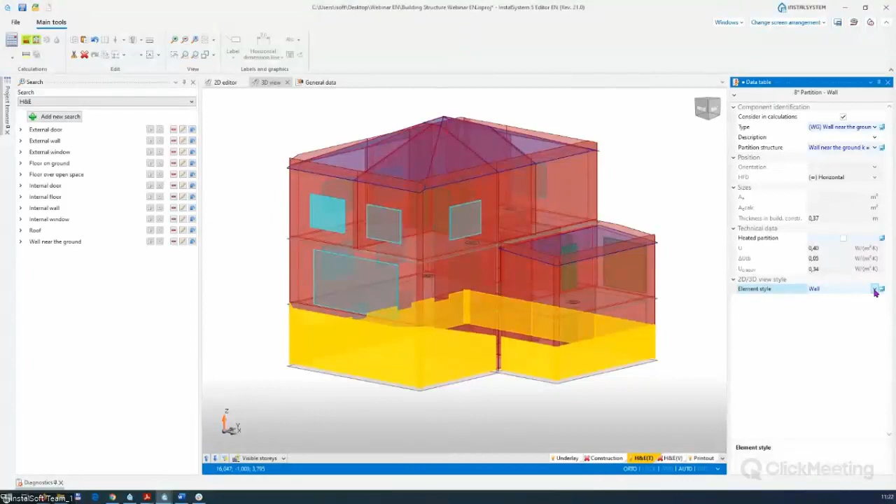And we have the multi-select. I can assign a different style color to a given partition. I think it's a great help in general verification of the correctness of the assignment of a given partition. Just click wall near ground and all, as you can see, I have on my 3D view. I could do the same things with others. So that's one step of our verification of our thermal model.

The second aspect of design verification is a complete list of partitions with a given room. When you change to the heat and energy scope, we need to wait a moment. When you click on, for example, one of the rooms, it could be maybe this complicated one.

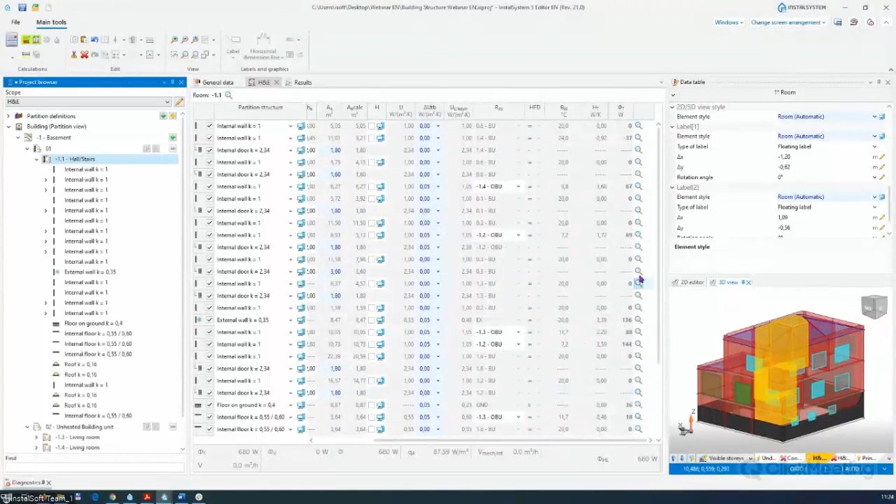Okay, here we go. In this place, we have a full list of partitions assigned to our room along with further data, and this partition structure. Of course I can mark every partition from this level. Just click on this button. By this button I can click and all these partitions are selected on 2D and 3D view.

Of course, you can work on more than one monitor, so your 3D view could be on other sides, and when you click on this button, all these kind of elements are selected in all active windows. Okay, so from this position I can change its assigned partition definition. I can also impose it manually.

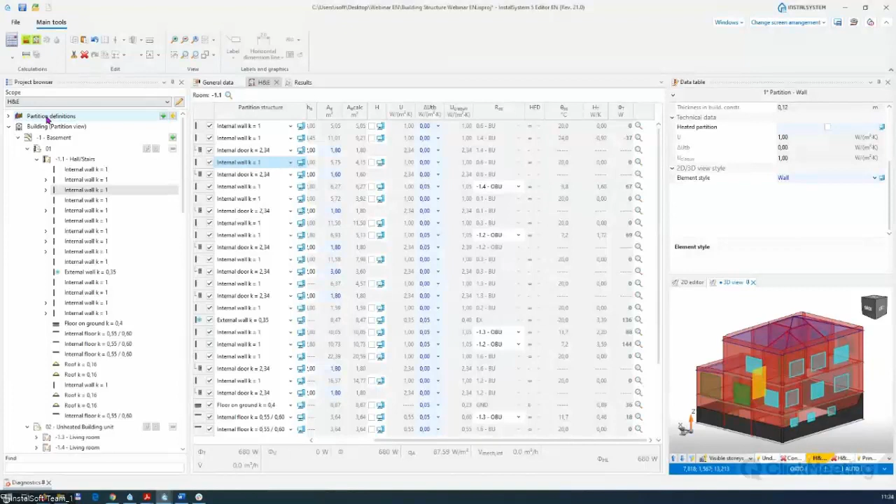So for example, when I have more types of, for example, internal wall partitions. First of all, as you remember, we can change the selection of criterion, for example, to match to any thickness. By the way, you can manually switch on your design purposes. Okay. What's important in this window? We have this checkbox and we have this plus.

You can add your partition by defining its appropriate properties. If you see that something is missing, for example, in my graphic model, and it's important to me from the point of view of calculations and losses for a given room, then you can add your partition structure and your partition definition manually. Okay, and you can assign it this partition definition. That's the first one.

Okay, the second one, you can deselect, so you can uncheck this checkbox to such a partition if you notice that it's not correct or unnecessary from the point of view of my thermal calculation. So it's enough to deselect it. You can make this deselection from this window, or you can make it from the data table. We have the same when you, for example, select one of the partitions. You can uncheck the consider in calculation.

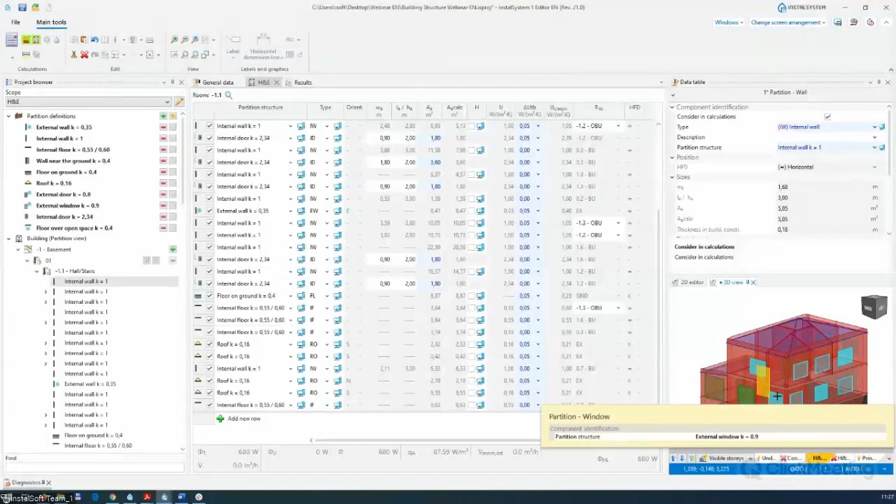You need to know this. There are some possibilities to make the manual modification based on our automation mode in InstalSystem 5. This mechanism allows me to react if we find that our program does not cover or incorrectly recognized a logical partition. Remember to always verify the project. We should also remember that a partition added in tables or unmarked does not disappear from our graphic model. So if you uncheck this checkbox, you still have the graphical representation on the 3D view. So this tabular window of partitions within a given room also allows for more advanced settings concerning a given partition.

Okay, and now I will open the other project, the last one, I think, because this is the last thing I wanted to show you in this webinar. In our program, it's possible to create such ventilation air diagrams, as you can see. We have a separated scope for this. It's the ventilation air flows. Okay, it's another scope. Input data for these diagrams can be found in room data. So when you go to the general data and go to room data, you can click on the room type, and for example, you can put the value to calculate the ventilation air diagrams.

Remember that of course the type of ventilation must be mechanical ventilation. You can, of course, in the 2D editor and 3D editor, put this value individually for a given room from the room data table. After setting and completing our design data, the program, after performing the thermal calculation of the building, creates and supplements the design with such ventilation air diagrams, which can be very useful when designing our handling unit in our project.

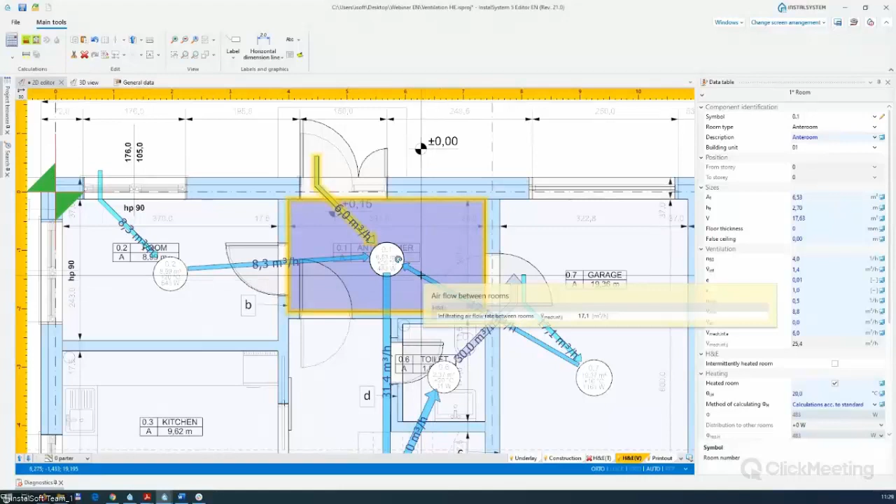For example, for this one, we have the information about the infiltrating airflow rate between rooms. So we have the information about infiltrating rate. Another one, yes. And the second one, that's the airflow rate between the rooms. Okay, the second one and the last one. Here we have the information about the excess exhaust air flux compensated from outside. Okay, and here we have the possibility to create such diagrams in our program. So yeah, that's the new one.

So in addition, the drawing scale informs us about this data. I think that it's a fantastic thing and it's already available to users from version 18. A lot of issues that have always been asked of support are based on the ventilation airflow in the old heat and energy scope. So earlier it was very hard to imagine what it looks like. Now we have everything in a graphic form.

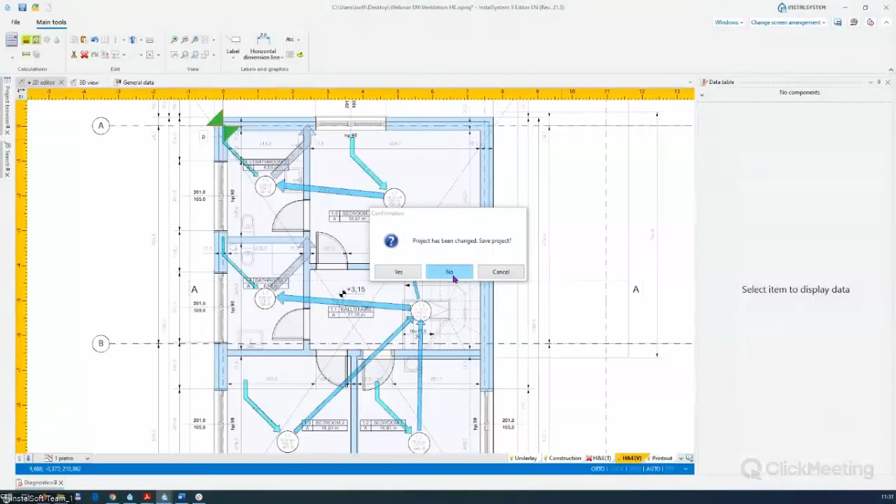As a curiosity, I would like to tell you that we are also working on exporting this data to the BIM format. In fact, I can show you the file from the development version. This is not available to you yet, but maybe I open this kind of project. As you remember, I showed you before this school with full heat load calculation, and maybe I open the free version of BIM Vision. It's one of the free programs.

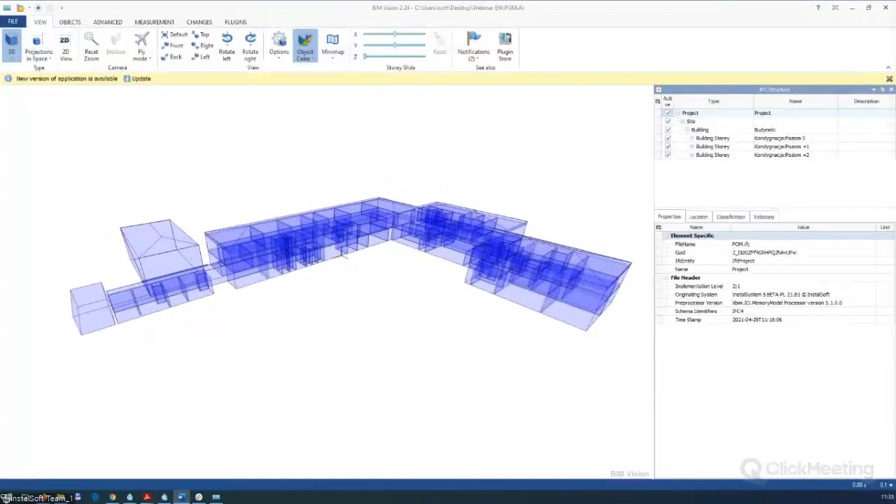That's our school. Now from the development version of our program, you can export this kind of files. However, this file only contains the rooms that have been exported using our new BIM module, the building structure export. And it's not only the shape, but in our development version, we are still working on it. It's from the Polish version, but here we have all the parameters about this room.

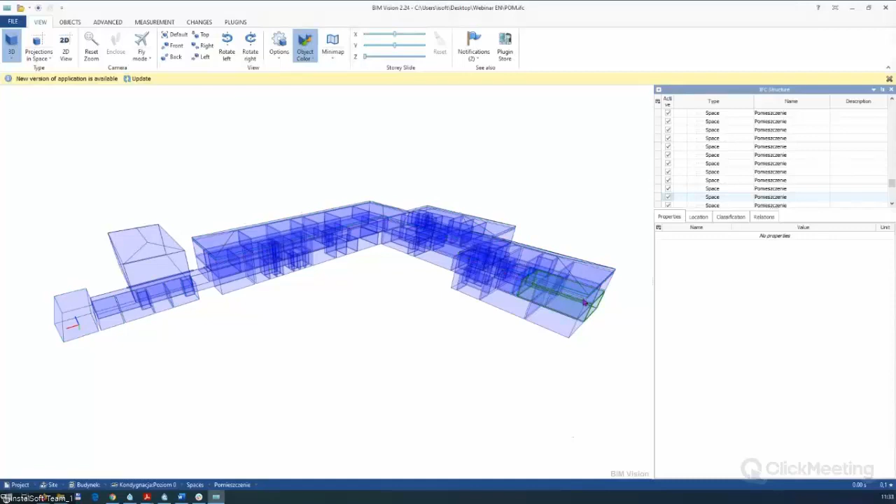So you can get, for example, the total heat loss from this room, and we have all this information, very specific ventilation information, for example, about the ventilation of each room, and that's the IFC model from our program. By the way, in the printout section, we created a dedicated window which allows you to export the structure of the building.

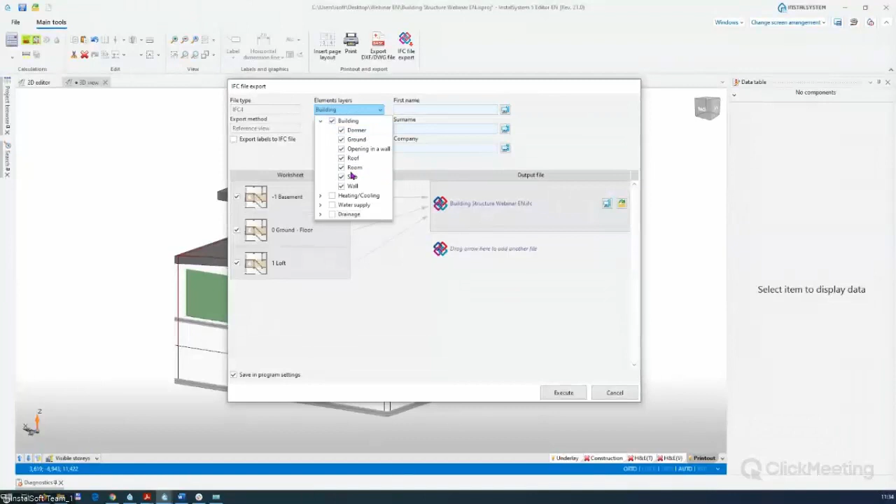When you click on the IFC file export, you have a dedicated window. By this window, you can, for example, export only elements of the building. It could be only, for example, a room or all the structure of our building. So in this case, I only exported room data. These rooms contain our parameters, specified in our program, calculated in our program.

And the second thing, maybe I open this one in the other window, because we can calculate this kind of buildings. Please give me a moment. Okay, it's the new publication 21. I want to show you how even large files like this can be calculated. This is a large real project from the south of Poland. This project has the entire heat load calculated from A to Z. We need to wait a moment.

We need to wait a moment. Okay, that's a large building. And when you change the thermal partition, only visible, we have the full heat load calculation of this building. So yes, it's possible in our program to make this kind of building.

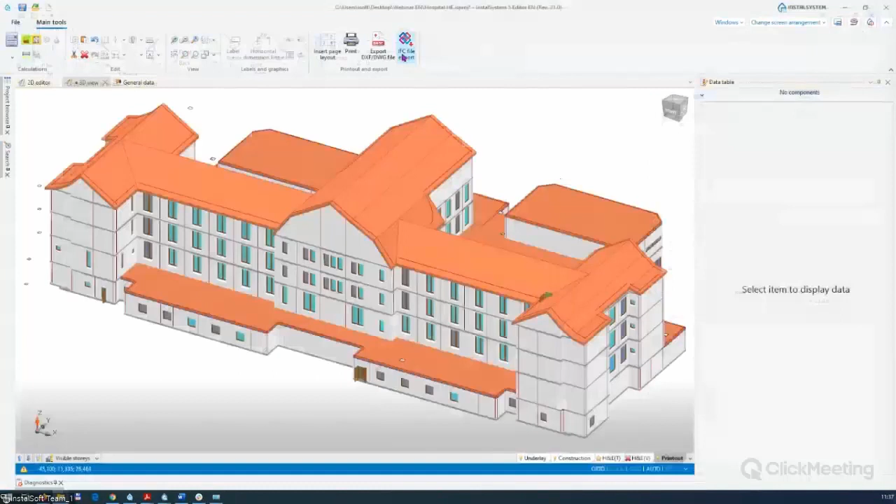I don't see this in IFC, but of course you can go to printout, and if you want, you can uncheck and export it with room parameters, or it could be only the full building structure, and it's available for you from publication number 21. Okay, I don't see this file. I did something wrong, I think. Doesn't matter. Maybe I'll show you this exported file with full building structure in another webinar.

So that's the possible design from our program with full calculations. So we go straight to the ending of our webinar.